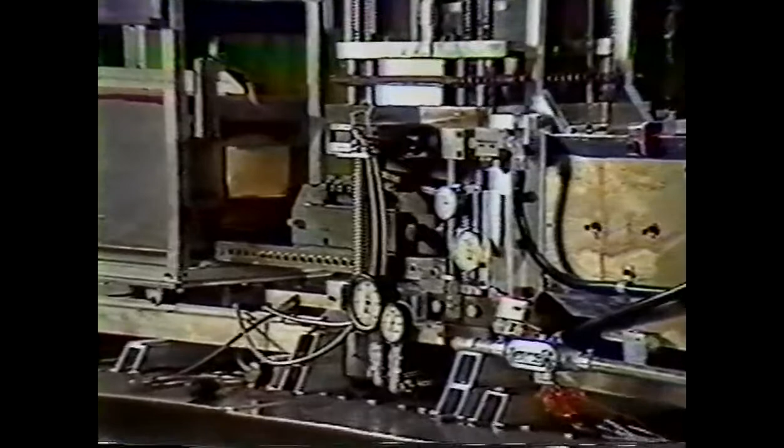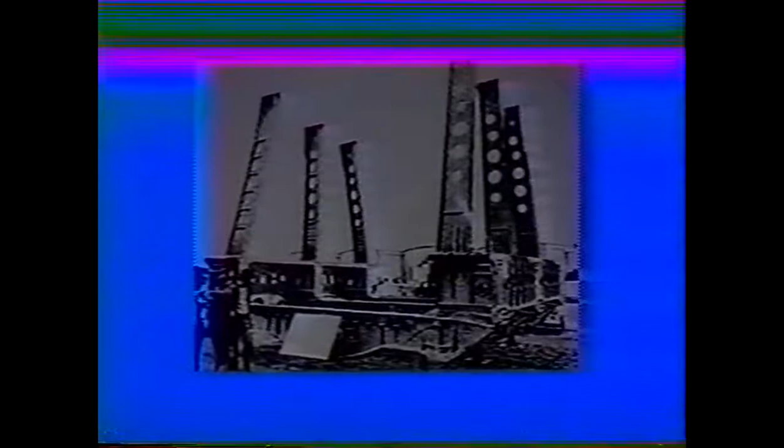Forging is taking on new dimensions. Increased widths and lengths to near-net shapes will soon be a reality. The operation you will see will not only meet most of the expectations of a 200,000-ton forging press, but will surpass them. Complete wing panels, long-varying cross-section extrusions, space vehicle structures, plus other commercial applications will be formed in a fraction of the time.

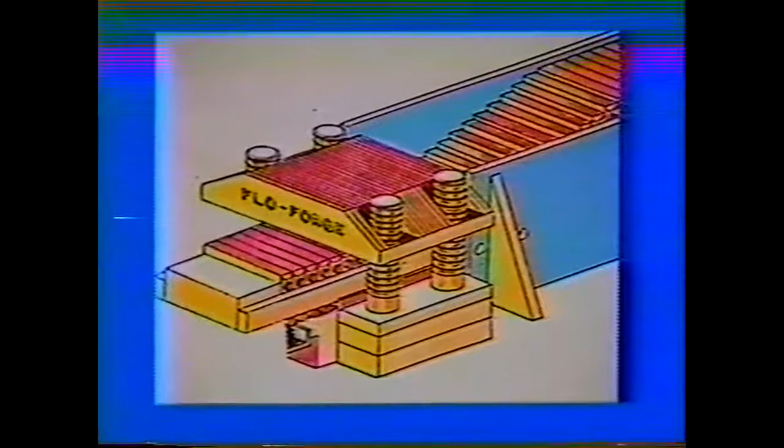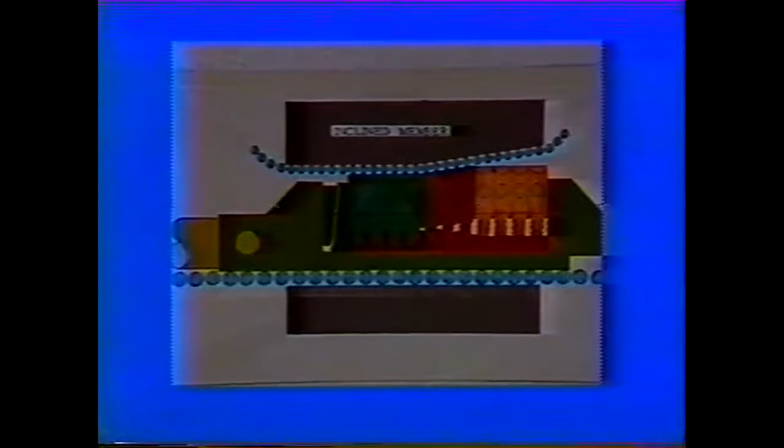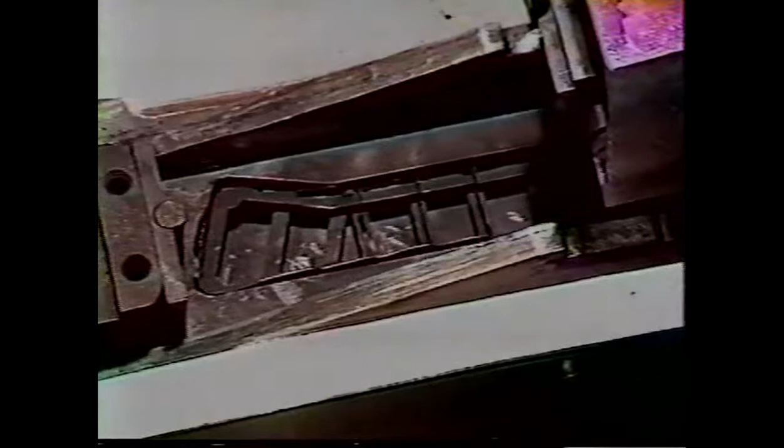A new development with a difference, called Flo-Forge, forms metal by squeezing it to conform to a die cavity as is done conventionally. The difference with Flo-Forge is that the male portion of the die is segmented, and each segment is forced down into the material to be formed, resting in the female part of the die. When all of the male segments reach the end of their travel, the resulting cavity between the male and female portions of the die is filled with material.

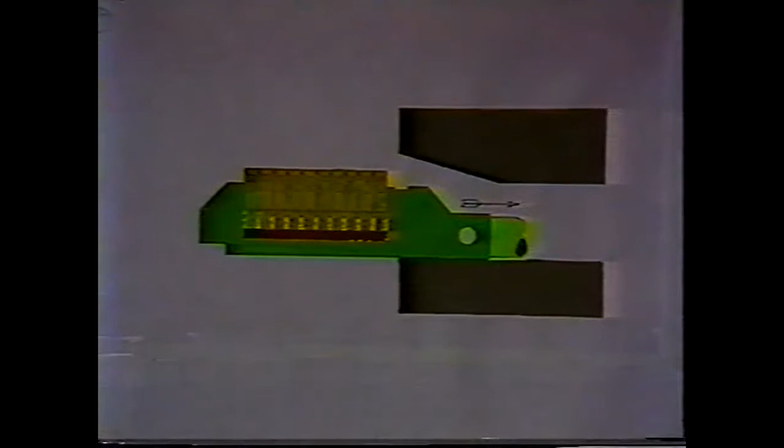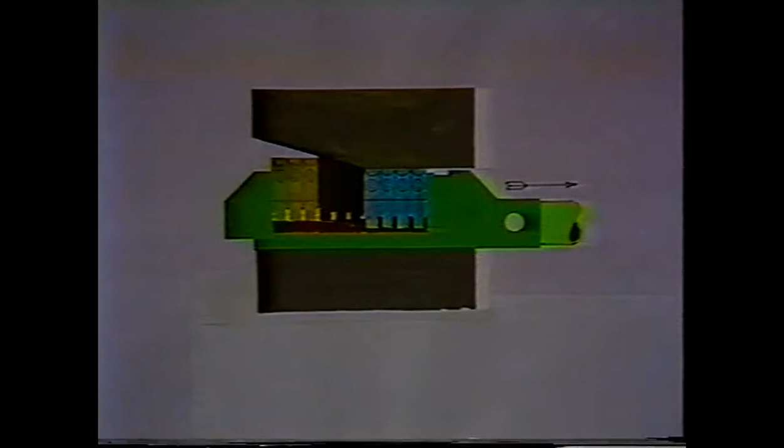Let's take a look and see how Flo-Forge works. The segmented male die rests on the material contained in the female. As the die assembly moves past the inclined plane, the male segments are gradually forced down in sequence, a predetermined amount. When finally past the inclined plane, the part is formed and ready for extraction.

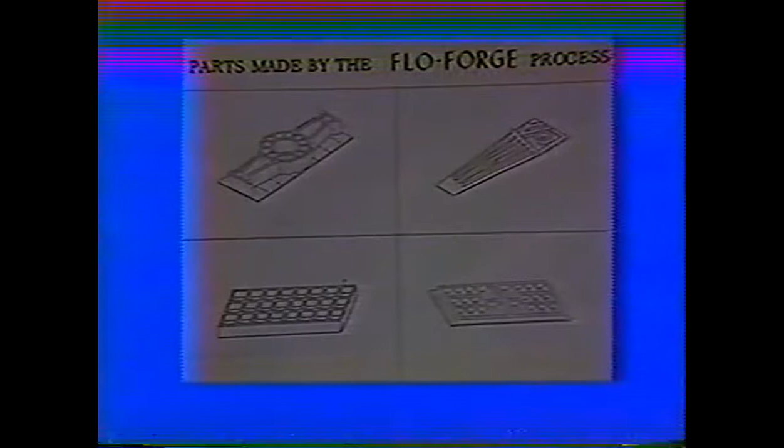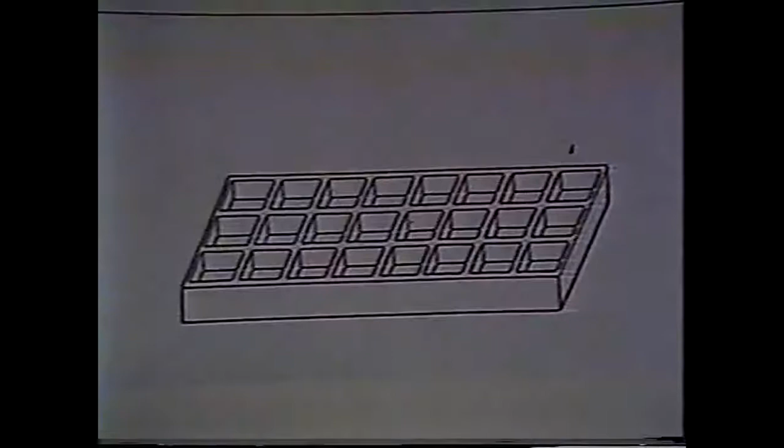Here you see the detailed configuration of these parts and how close to the final shape they are. These parts, although limited to a plan view of 3 by 8 inches and a height of almost 1.5 inches, can be easily scaled up to form larger and longer parts.

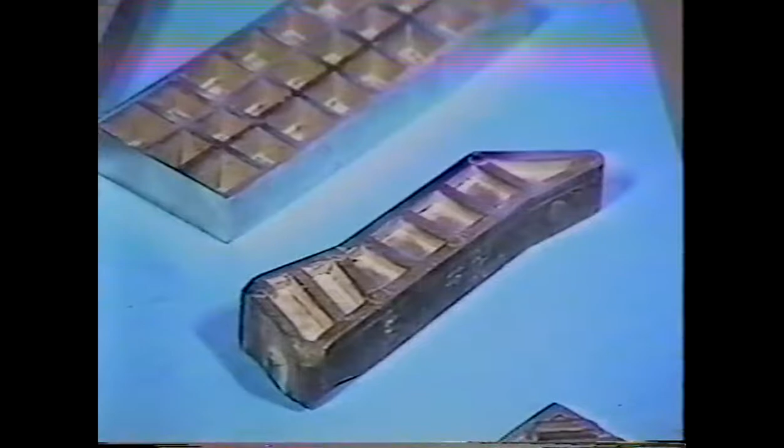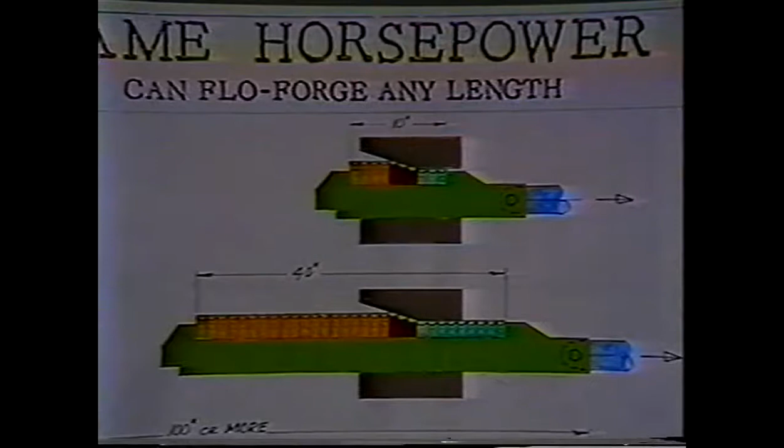This statement can be made with confidence, since the power requirements to make a 3 by 8 inch part will be the same as making a part of any length. The power requirement does not change because the male segments are forced down sequentially, a small group at a time. All that is needed is a hydraulic cylinder with a greater stroke to pull a longer die past the inclined plane.

With the Flo-Forge system, forming and shaping parts becomes a very simple operation and is easily repeated after the required parameters are established. Let's look at this simple operation.

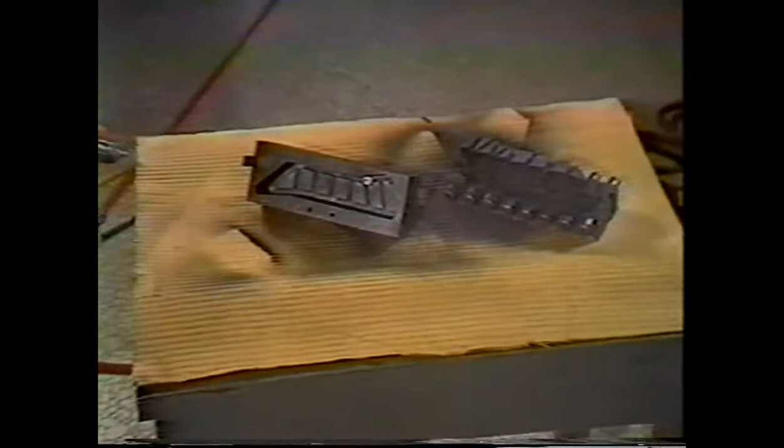The die components, male and female, are coated with a high-temperature lubricant. Each coating will survive the squeezing of several parts. At this time, the material to be formed is also coated.

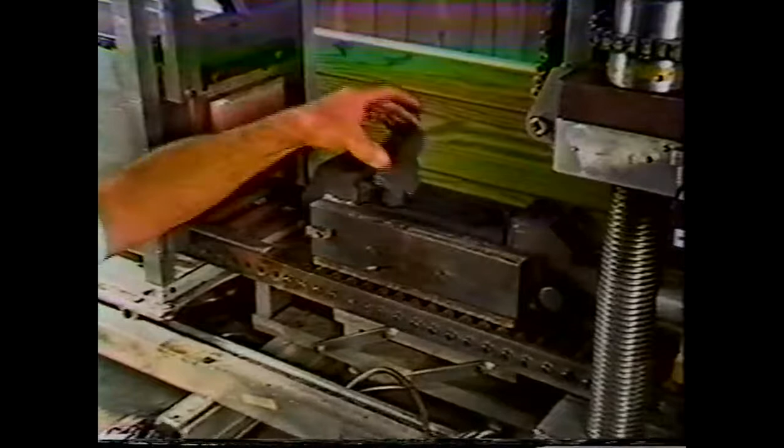The female portion of the die is placed in the machine die container, ensuring that ejection pins in the female are properly seated. The material to be formed is placed into the female, and the male die segments positioned over the material. End wedges are positioned and secured to ensure precise downward motion of the male segments.

Now we obtain a reading where the male die segments are all resting on the material to be formed. This is the reading from which all penetration dimensions are made. This reading is obtained by lowering the upper platen by motor until it almost touches the die assembly. The rest of the downward motion is done manually to get an accurate starting position.

When this position is obtained and recorded, the die assembly is retracted from the inclined plane and placed on the oven bed, where the thermocouple cables are positioned. A switch is then activated to lower the oven over the die. Power for the oven is switched on, and the temperature controller is set.

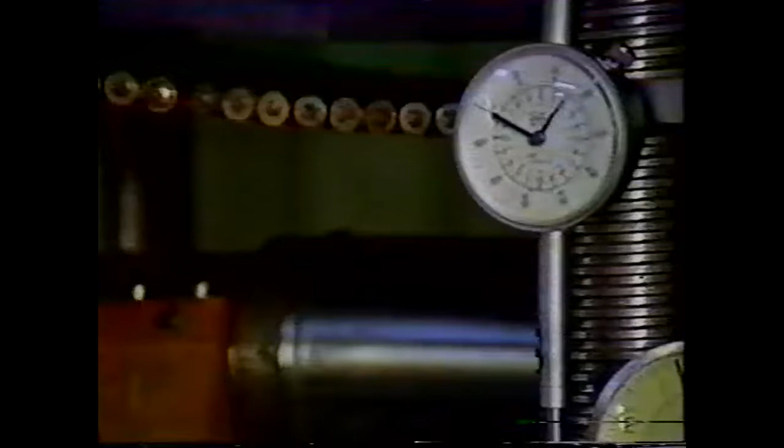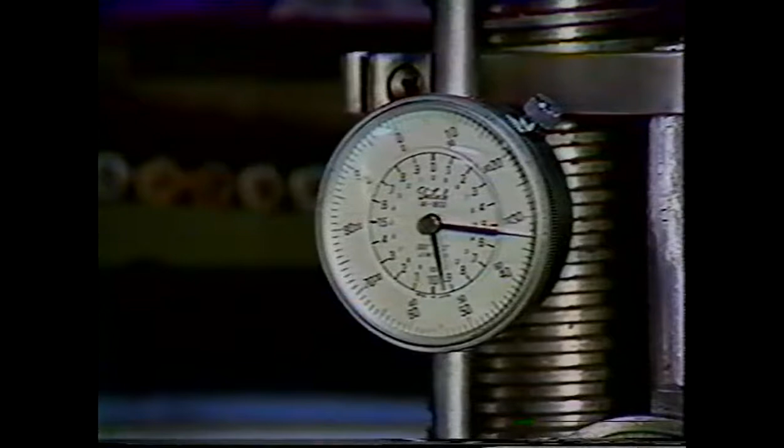While the die and material are being heated, the upper platen is lowered to provide for proper penetration. The initial lowering of the platen is motorized. Then manual lowering will control the penetration to within 1/1000th of an inch.

The aluminum alloys to date include 2024, 6061, and 7075. A soak time of 1 hour at the required temperature has worked very well for the 5 different configurations forged to date.

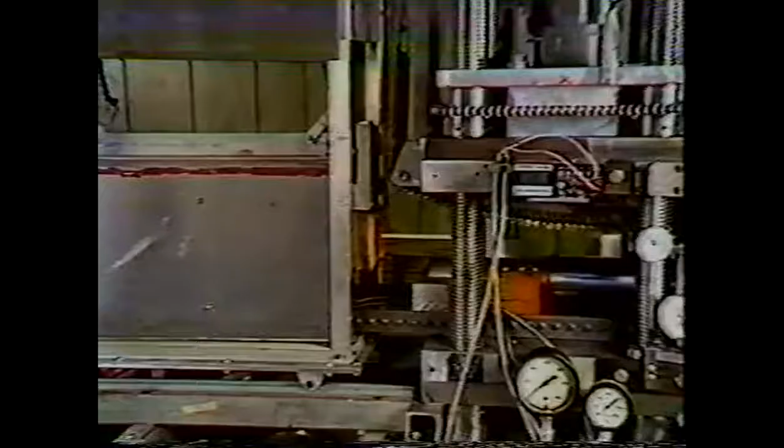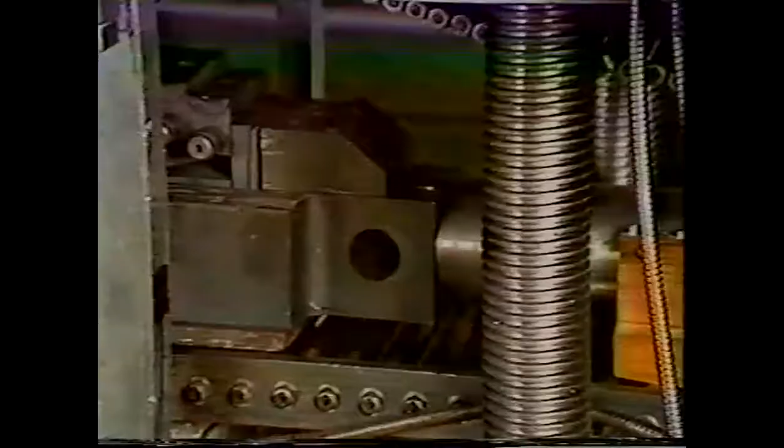At the proper time, the oven is raised. One of the thermocouples remains in the die cavity to monitor the temperature during the forging process. The die is advanced to the work area, where a shear pin is used to secure the die to the power cylinder.

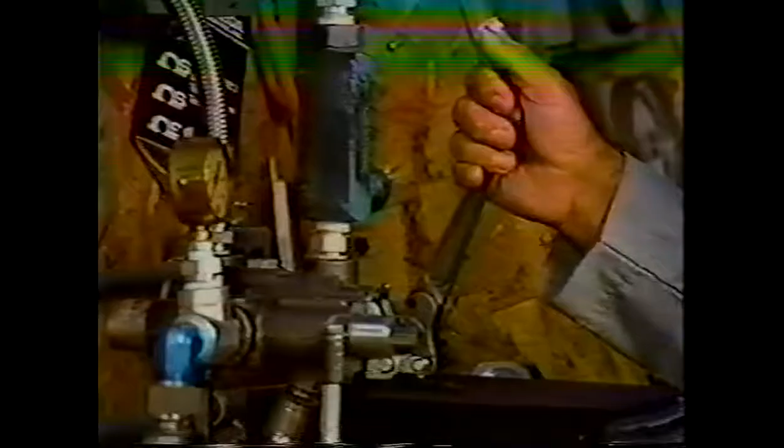A 5-horsepower motor that drives a 3,000 psi pressure compensating pump is started, and a hand-operated switch retracts the piston of an 8-inch diameter cylinder, which gradually but firmly pulls the die assembly past the inclined plane.

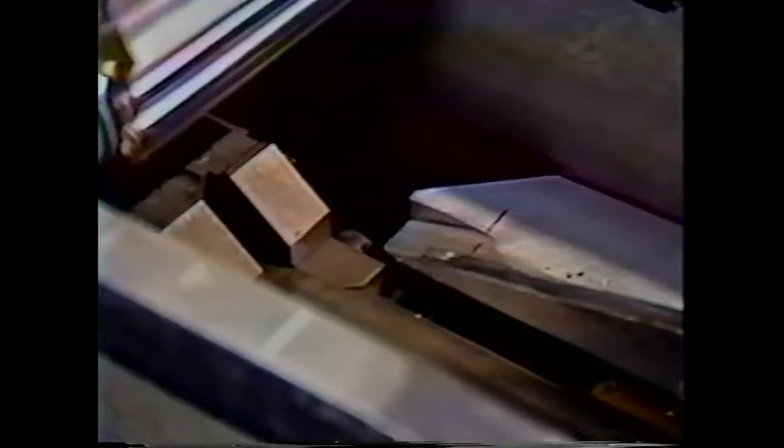It takes 20 seconds to form an 8-inch long part. A unique feature of the Flowforge system is the ejection ramp that gradually lifts each male segment from the female as soon as the part is forged.

As the die assembly leaves the flat portion of the inclined plane, the roller bearings on each male segment roll up on 2 inclined rails to easily and smoothly remove all of the male segments from the female. These segments roll onto a platform and remain there while the die cavity returns to the loading station to eject the part.

For these prototype applications, part ejection is simplified by removing the female die from the machine die cavity and placing it in a simple hand-operated hydraulic rig where the ejection is done. Less than 2 minutes has elapsed since the die assembly left the oven station, the part forged and ejected.

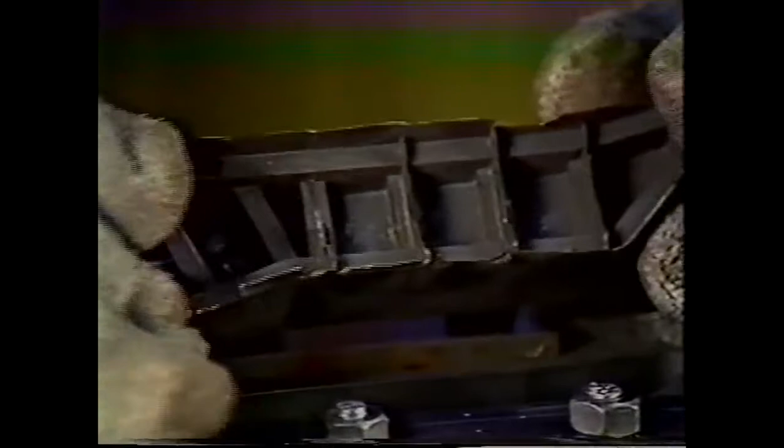This part has ribs on both sides. All the edges and corners are as sharp as intended.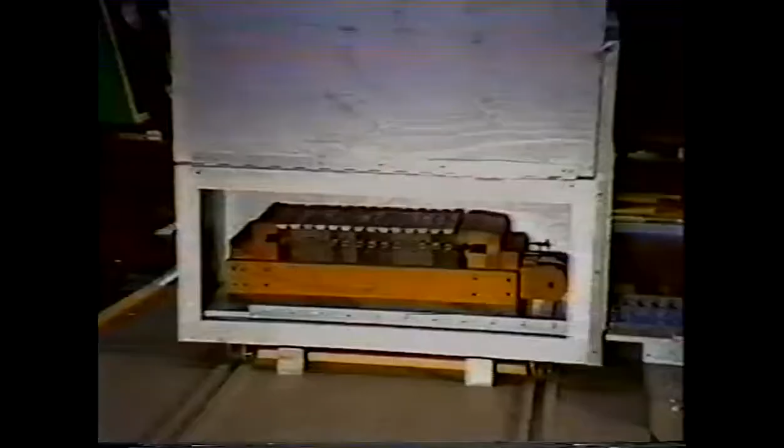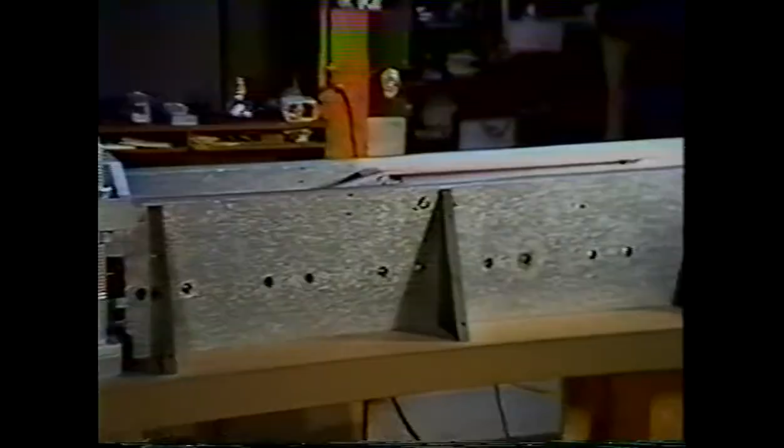Let's look at a wooden model of a production-type Flo-Forge machine. The process is so rapid, it can keep several furnaces busy heating dies and material. The major difference between this model and the prototype is that the compression sidewalls are equipped with indexing holes.

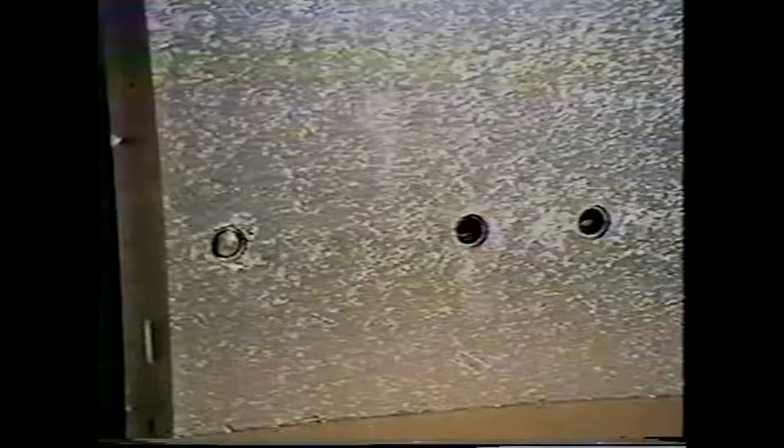To avoid the expense and limitation of using a fixed large cylinder with a long stroke, a system of indexing holes in the side plates allows for a shorter cylinder to index back and forth as required. A standard cylinder with a short stroke can be used to forge parts of any length.

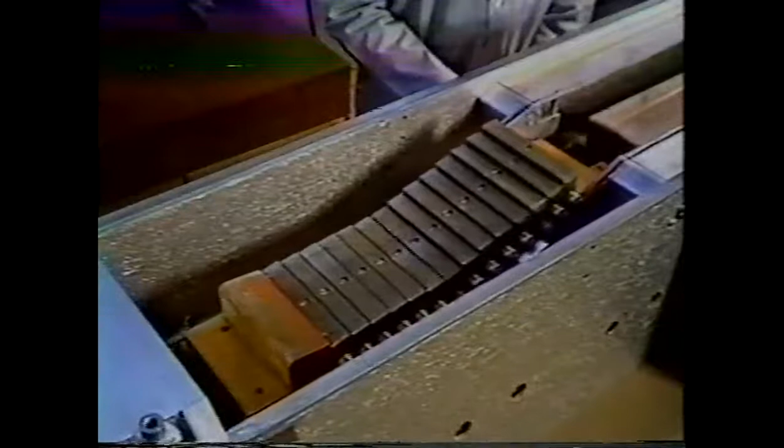Movable furnaces are included as part of the system to effectively move large dies quickly and easily between the furnace and the inclined plane. All of the force required in shaping the material is performed at the inclined plane, and the power needed is only a fraction of that required by conventional forging equipment.

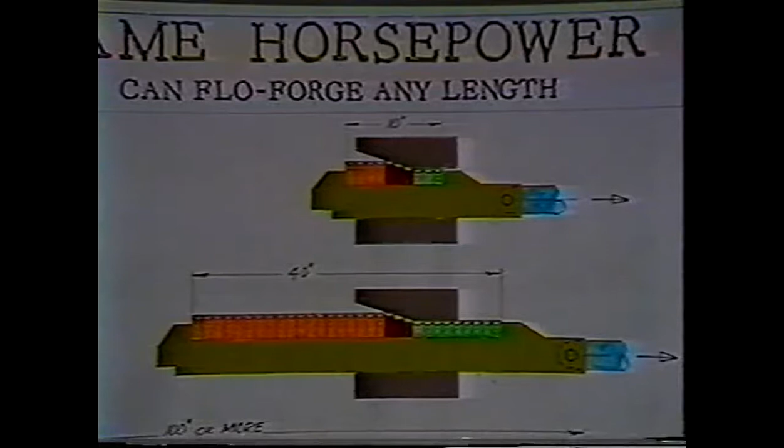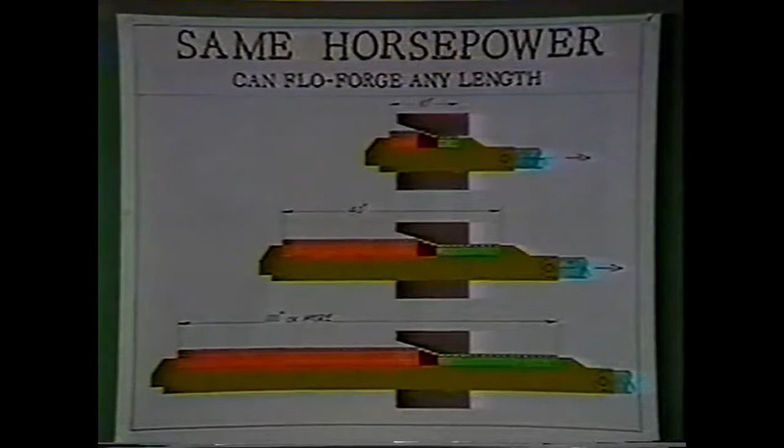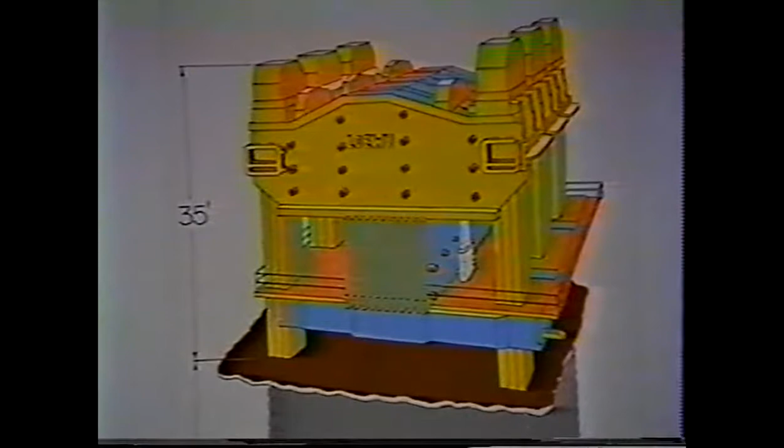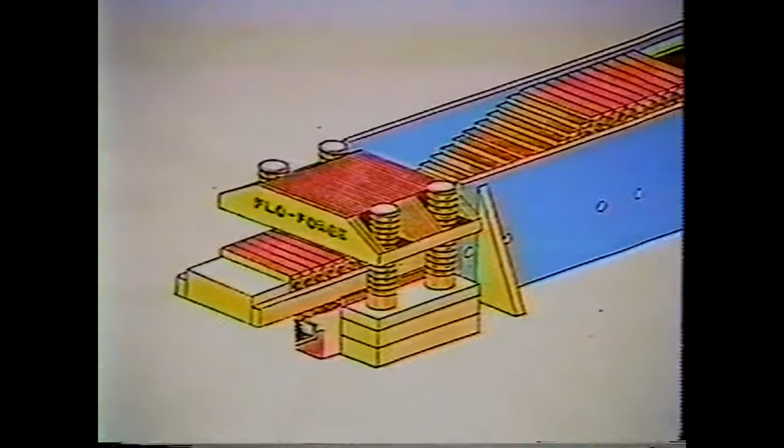This massive amount of steel, 35 feet above ground, with a 70-foot foundation to contain the multiple large diameter cylinders, plus a pumping station and large holding tanks, requires a great deal more space than a Flo-Forge system. The Flo-Forge system has a maximum height of only 10 feet, with nothing below ground.

If there is a requirement to make larger parts, the inexpensive revision is to merely add side plate extensions. Power requirements do not change.

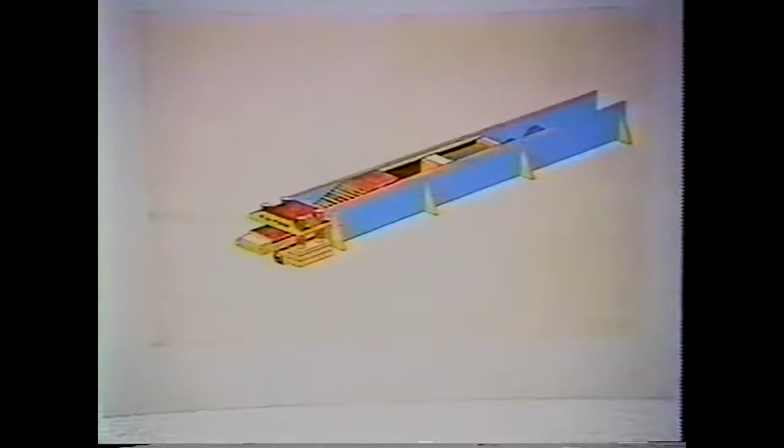The one cylinder required for the Flowforge system is mounted on the power tray, along with an electric motor, pump, and a hydraulic storage tank. The power tray comes completely assembled as a unit and is easily installed and serviceable.

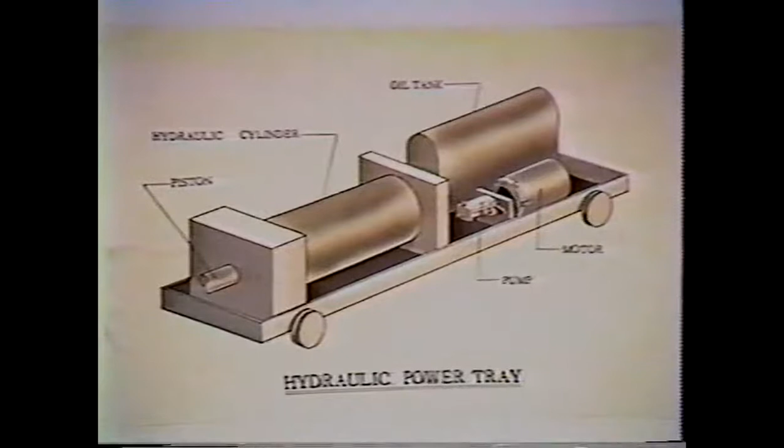One electric cable connects the power tray to the system. Our projections show that Flowforge systems can be fabricated in various sizes with virtually no limitation for expanding size or capacity. The power rating for Flowforge equipment is in tons pull, as compared to tons for standard hydraulic equipment.

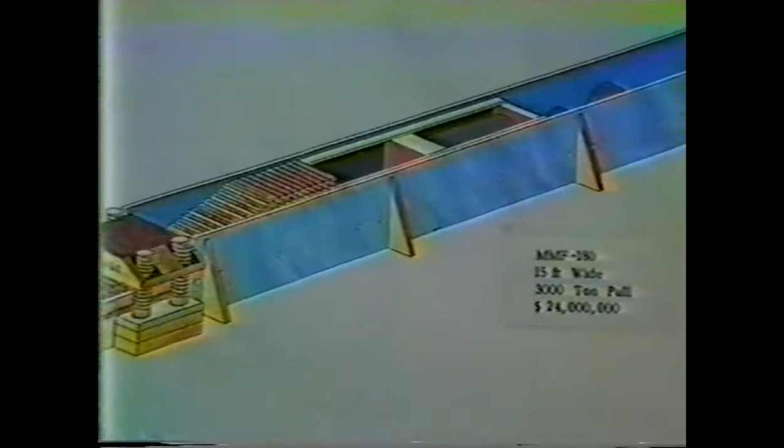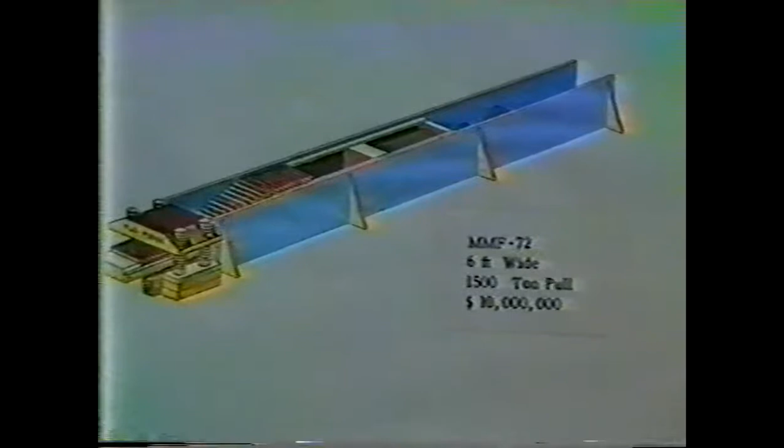As an example, the MMF-72, a 6-foot wide system which is rated at 1,500 ton pull, can forge a 5-foot wide by 20-foot long wing to near net shape. Conventional equipment would require a 350,000 ton press.

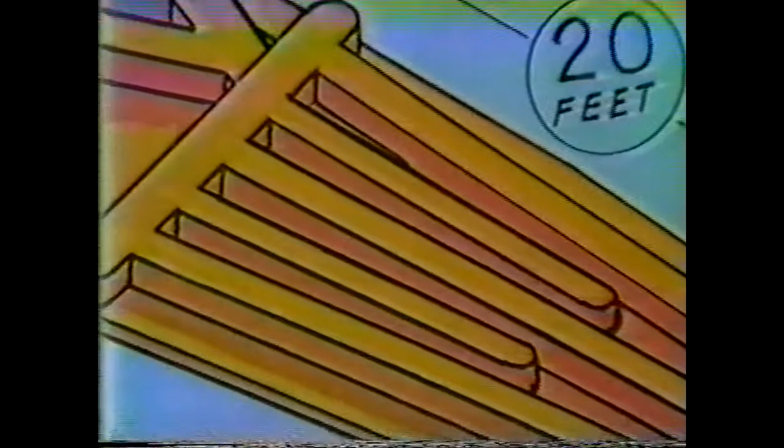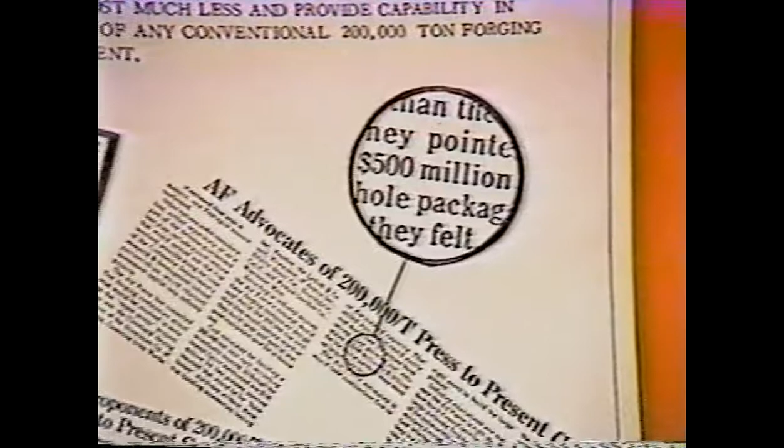This MMF-72, at a projected cost of $10 million, is considerably less than the estimated cost of the 200,000 ton press the Air Force has been seeking for years. The work performed has demonstrated the versatility and potential of the Flowforge system over conventional large systems.

The advantages we can look forward to are less costly to design and fabricate, less costly to install, operate, and maintain, more energy efficient, greater material savings.

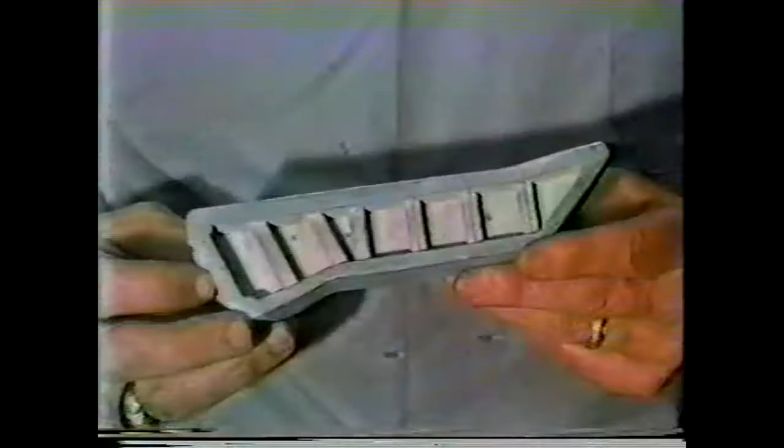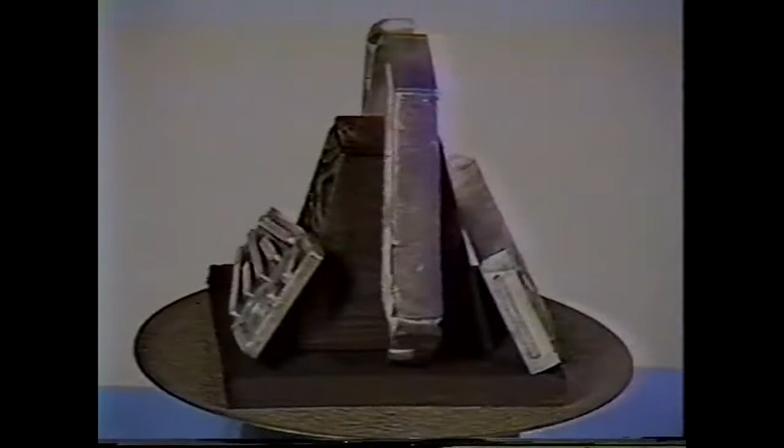One cycle shapes the part to very near net shape. We are confident that in the future, JM Enterprises, with the Flowforge, will make larger and longer parts to closer tolerances than ever thought possible, and at a fraction of today's costs.